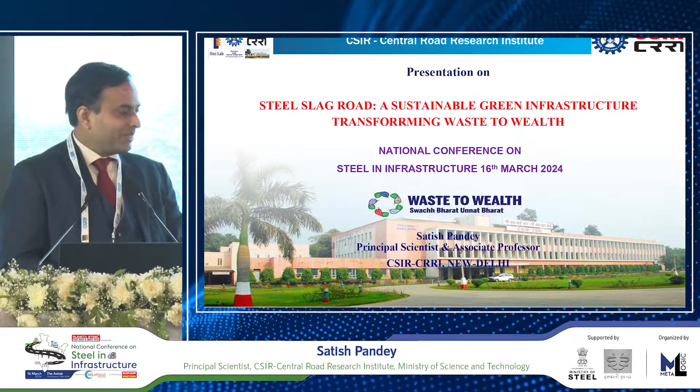It's indeed my privilege to present this work in front of two former Secretaries of the Ministry of Steel. During the tenure of ma'am, this particular work was conceptualized and it reached its first successful breakthrough during the tenure of former Secretary of Steel, Mr.

Sanjay Singh sir. So, it's a kind of a waste to wealth transformation, which we have carried out under a major sponsored research study funded by Ministry of Steel along with four major steel industries comprising ArcelorMittal Nippon Steel, Tata Steel, JSW Steel and Rashtriya Ispat Nigam Limited.

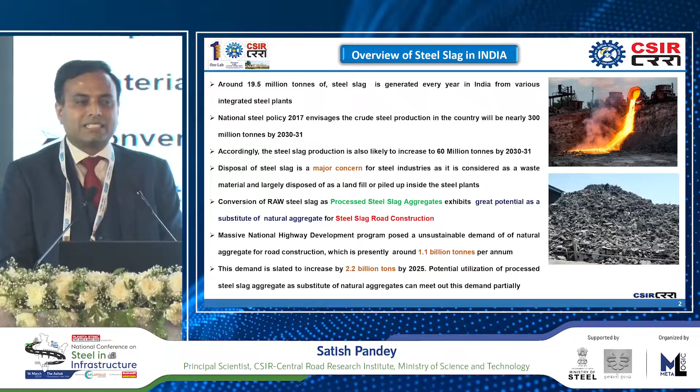So in India, around 19 million ton steel slag is produced as a solid waste annually, and this quantity is expected to reach 60 million ton by the end of 2030 with the expected augmentation in steel production in the country. At the same time, we are utilizing around 1.1 billion ton natural aggregate every year for the construction and maintenance of road network. So there is dearth of good quality natural aggregate, and acute scarcity has been faced by various national highway projects across India, particularly for the road construction and maintenance work.

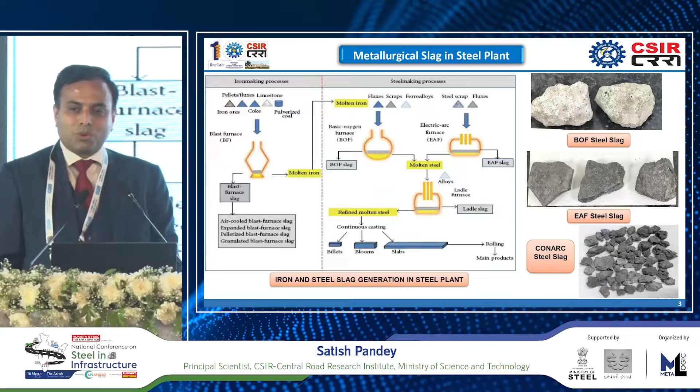So in an integrated steel plant, there are two major types of slag generated. One is iron slag, which is commonly known as blast furnace slag, and another one is steel slag. So blast furnace slag, after conversion into granulated blast furnace form, has found very good utilization in cement manufacturing. But as far as the steel slag is concerned, its disposal is a very big challenge to the steel industry. For every ton of steel production, around 200 to 300 kg steel slag is generated as solid waste.

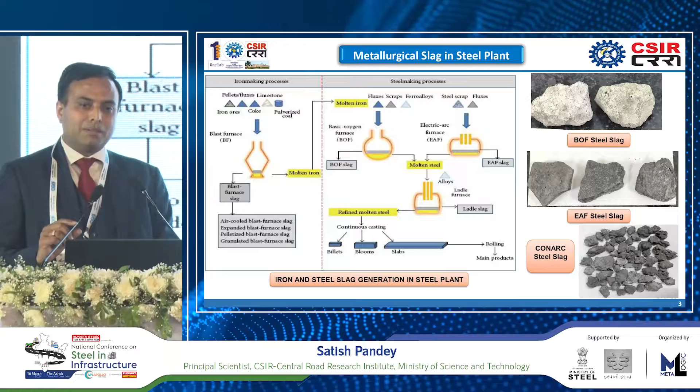Depending upon the type of furnace through which steel slag is generated, it can be further classified as basic oxygen furnace or LD steel slag, electric arc furnace slag and the CONARC slag. So these are the three major routes through which steel slag is produced in an integrated steel plant. Besides that, in smaller steel industries, the MSME sector, steel slag is generated through the induction furnace route as well. So our major work is basically focused on the BOF, EAF and CONARC steel slag.

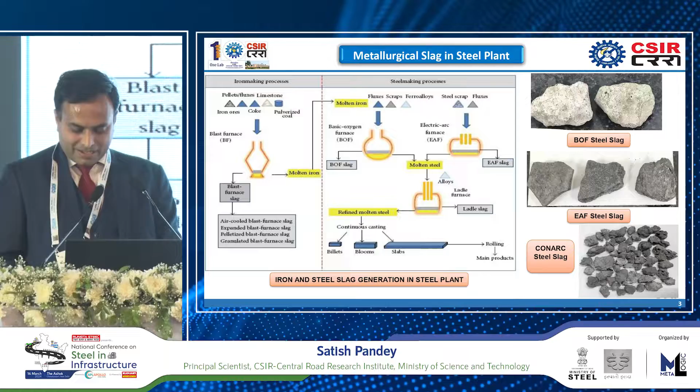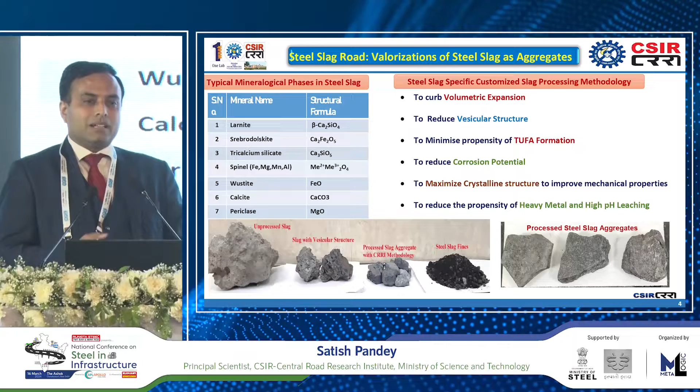So as such, the steel slag cannot be utilized for road construction. There are several intrinsic challenges which include volumetric expansion, in the tune of 8 to 14%, due to presence of free lime and magnesia. There is a vesicular structure. It is not equivalent to the natural aggregate. There are chances of tufa formation, chances of corrosion, as well as heavy metal leaching.

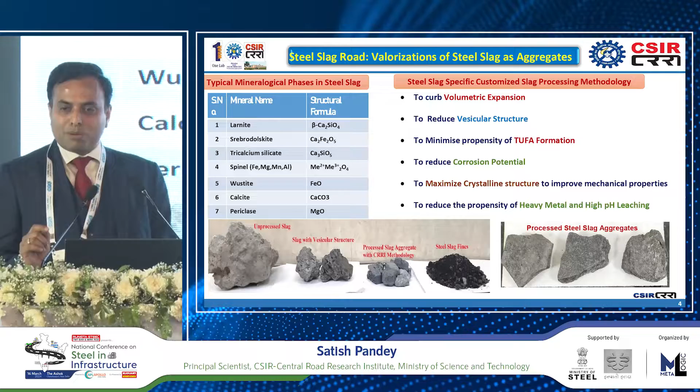So what we did, we have developed customized steel slag valorization technologies to convert different types of steel slag into processed steel slag aggregates for road making. And the last picture which you can see is a good quality processed angular steel slag aggregate, which has even better physical and mechanical properties than conventional natural aggregate used for road construction work.

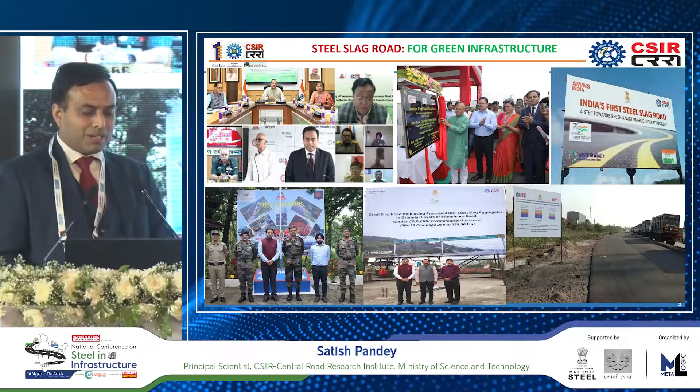After doing that, we got a few steel slag road sections constructed across India, and the first steel slag road section was built in March 2022 at Surat Hazira. So this 1.2 kilometer 6-lane bituminous steel slag road is constructed using electric arc furnace steel slag of ArcelorMittal Nippon Steel plant, and around 1 lakh ton processed EAF steel slag aggregate was utilized as 100% substitute of natural aggregate

in this road construction. So one of the novel features of this road is that the overall thickness of this road is around 32% less than the conventional road prescribed in the Indian Road Congress guideline, which makes it around 40 to 42% more economical than the conventional one, sir.

The next project which we accomplished is the NH66 Mumbai Goa. So on this particular section, we have utilized around 80,000 ton processed CONARC steel slag aggregate as 100% substitute of natural aggregate in cement concrete as well as bituminous slag road construction. And once again, there is around 28% thickness reduction in this particular project, which makes it 38% economical.

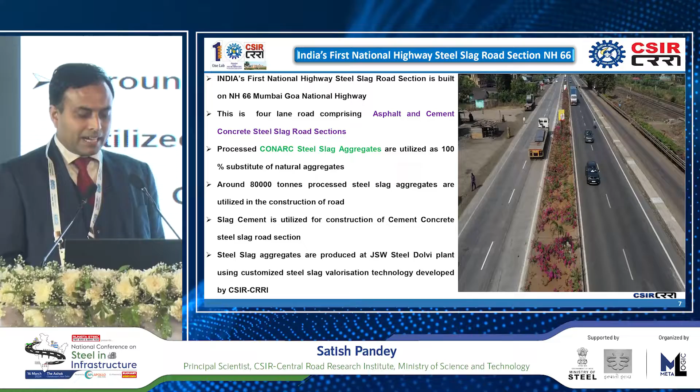So the major intention in constructing this road was to have a highly durable road under adverse climatic and high rainfall conditions. The conventional road at this particular location could not last for 3 to 4 years, but as per the study carried out by Border Road Organization, this surfacing is expected to have a 10 to 12 year lifespan.

So the Border Road Organization is working on a plan to utilize this particular technology for road construction in a longer way. The fourth section is NH33. So on this particular section, we utilized Tata Steel LD slag aggregate for the construction of a 40 kilometer long section. But in this particular road, this slag aggregate was utilized only in the granular layer. Not all the road layers were constructed using it.

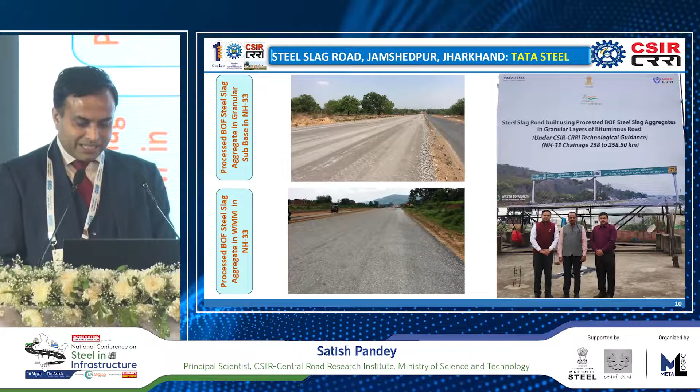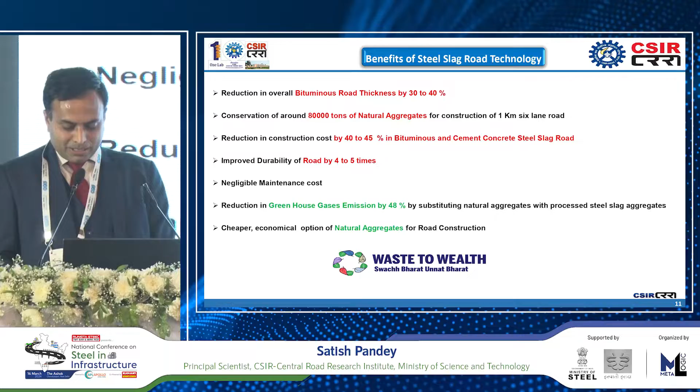So the major benefit of the technology is that we can reduce the overall road thickness by 30 to 40%. Around 80,000 to 1 lakh ton natural aggregate can be saved by utilizing the industrial waste derived processed steel slag aggregate in road construction. It's cost economical also. The overall construction cost can be reduced by 40 to 45%. It has higher durability of at least 4 to 5 times. It has negligible maintenance costs, and it also reduces greenhouse gas emission in the atmosphere.

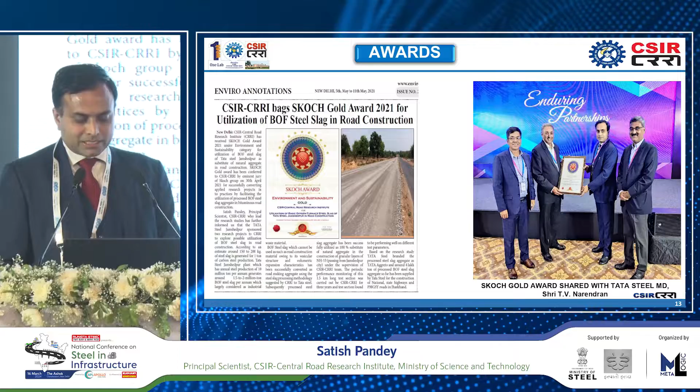The Honorable Prime Minister of India has also appreciated our effort through the appreciation letter sent to CSIR, especially mentioning these projects, and they have requested us to submit a 5-year vision plan to implement the steel slag road technology across India. We received a couple of awards for this sustainable initiative along with the Tata Steel Managing Director.

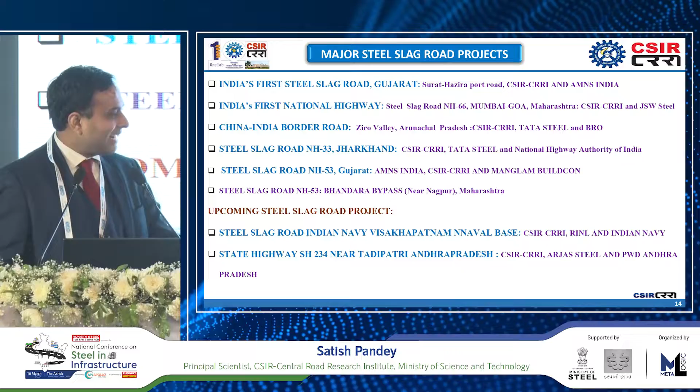These are the different steel slag road projects which have been completed so far, and a few which are underway. So with Arjas Steel also we are constructing one steel slag road near Tadipatri on State Highway 234 with PWD Andhra Pradesh. That's all from my side.

I have a small AV of 3 to 4 minutes. If ma'am permits, I can run it quickly, sir. Yeah.

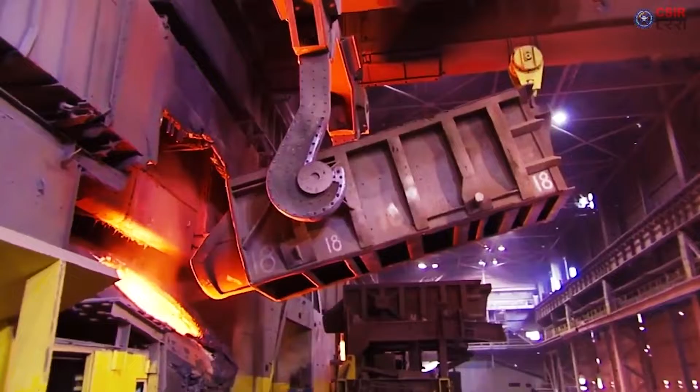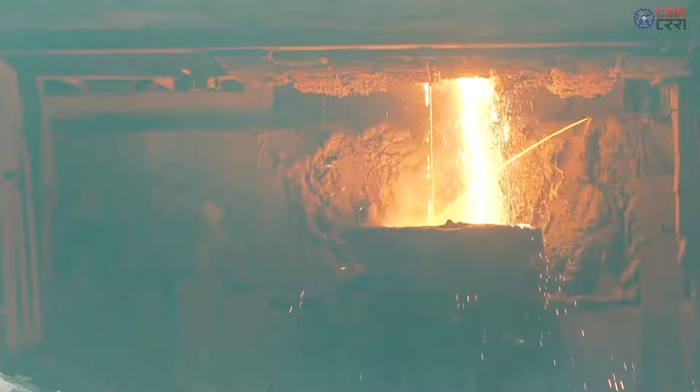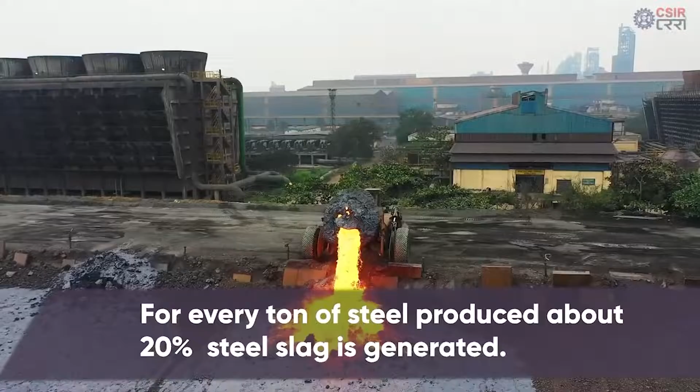Iron and steel industry are pillars to a country's economic and infrastructure development. India produces about 110 million tons of steel annually and is poised to achieve 300 million tons steel production by 2030. Along with steel, about 19 million tons of steel slag is generated every year during the refining process of steel from different steel plants situated across India. For every ton of steel produced, about 20% steel slag is generated. Most of the slag is dumped in the nearby areas of steel plants, which becomes the source of water, air, and land pollution.

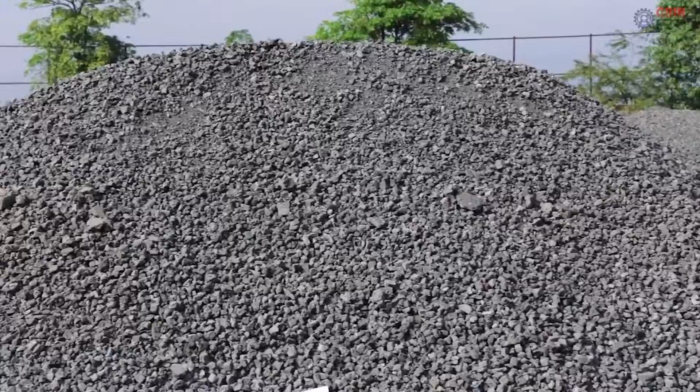Steel slag, which is rich in iron content, can become the source of good quality steel slag aggregates for potential utilization as a substitute of natural aggregates in road construction. In India, Surat has become the first city in the country to get a processed steel slag road built as part of a joint venture project between CSIR, Central Road Research Institute (CRRI), Union Ministry of Steel, Government Think Tank Niti Aayog, and ArcelorMittal Nippon Steel India at Hazira, Gujarat.

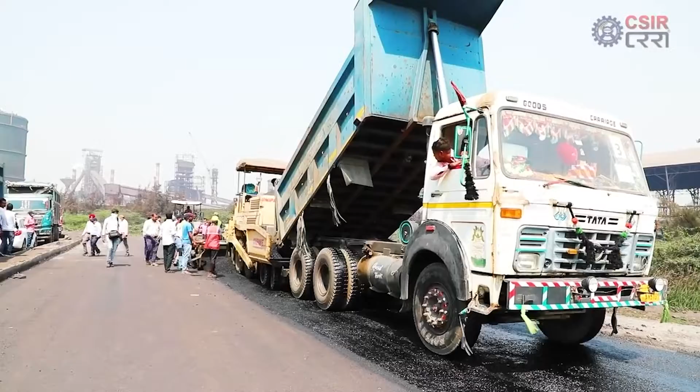I would like to congratulate CSIR CRRI for developing this innovative solution for utilization of processed steel slag in the construction of a steel slag road. Research has shown the possibility of using steel slag in road infrastructures in order to promote the objectives set out by the Sustainable Development Goals to promote the circular economy and sustainable infrastructure. CSIR CRRI's innovative first steel slag road in Surat, Hazira has further motivated our vision. For a greener India, for a sustainable India, for a rising India, Steel Slag Road. A sustainable green utilization of steel slag in road construction.